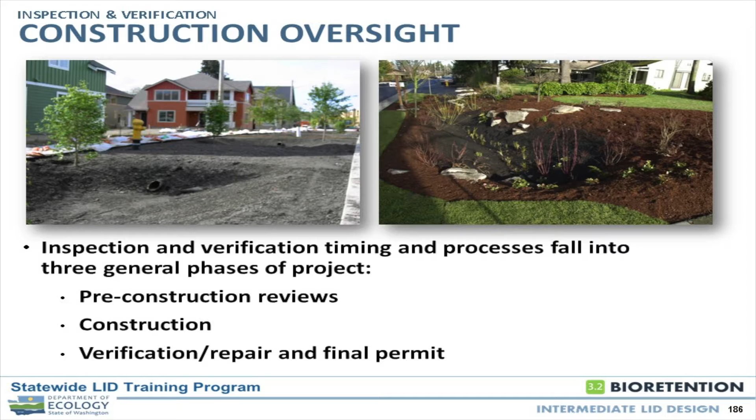On construction oversight, in general, the inspection verification comes in three phases: pre-construction reviews, critical construction, and then verification, repair, and final permit. So depending on your jurisdiction it might be a little different than this, but you can organize your inspection verification around that. Pre-construction reviews, I think this is probably your most important step.

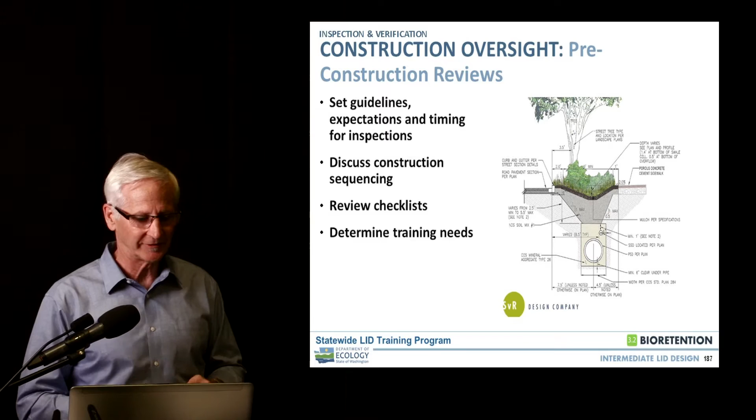You can avoid a lot of problems getting everybody in the room together. Setting the guidelines, expectations, timing for inspections. Construction sequencing, checklists, determine training needs. So just as an example of the importance of pre-construction meetings, checklists and plans.

Years ago, we built a low-impact development pilot project, and one of the stormwater requirements was that all of the lots, because they were entirely disturbed, they were very small, 3,500, 4,000 square foot lots, had to be compost amended, BMP T5.13, which you have to do now. By the way, that's just a blanket requirement now. Those guidelines were in the landscaping section of the plans.

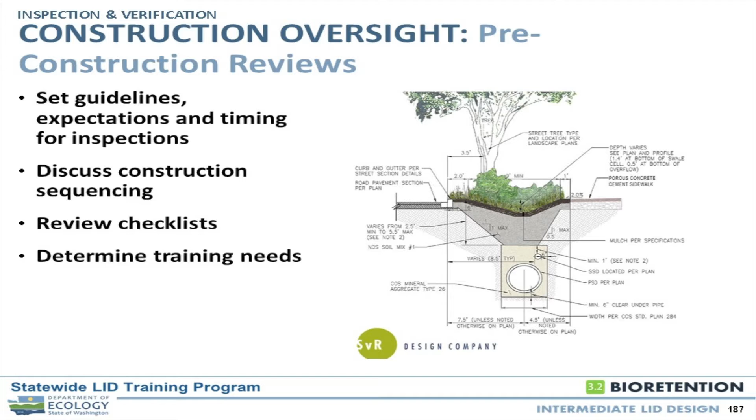Did the folks doing the utilities, stormwater, all that, look in the landscaping plans? And so at the end of the project, it comes to, oh, by the way, when are we going to get the compost spread and tilled in and do the compost amendment? And the developer says, what? What compost amending? Because they were not accustomed to looking in a landscaping section of the plans for stormwater requirements.

So that's a great example of how important it is to get everybody on the same page. Where is everything? Where are all the requirements? Are we all clear on what we're doing? What you're responsible for, and what's the timing of that? The pre-construction thing is absolutely critical.

Well, there's 2, 3, maybe 4 missing on this list purposely. What would be one group you would want in pre-construction reviews that might be really important? Has to do with road widths. Fire and safety. That's a really important one to have in the room, up front. In fact, earlier than this, in the initial design considerations, to make sure you're meeting all fire and safety requirements.

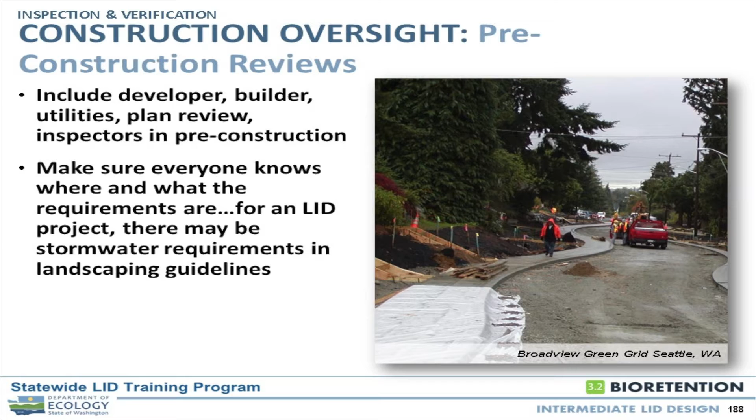Fire and safety is getting more used to seeing this stuff, but 10 years ago, fire and safety was a major barrier to the implementation of low-impact development, because there was a lot of talk about reducing road widths, right? And fire and safety was, wait a minute, my stuff's getting bigger, and now you're telling me we're going to have smaller roads? And so there was a lot of saber rattling around that. I think that's kind of settled down a bit, but that's a very important group to have in the room up front, very early on in design.

First site visit, pre-bioretention soil media placement. So here's at least a partial list of things you want to consider. And I'll mention at this point, I think Seattle now has some pretty good construction checklists that are available to use if you'd like. Very important, certify native existing soils are comparable to design considerations, temporary erosion and sediment control in place.

Rough grading to plans, underdrains and overflow, field changes. How are you going to deal with that? Are you going to accept photo documentation of certain phases of the project? That's a question you have to ask up front.

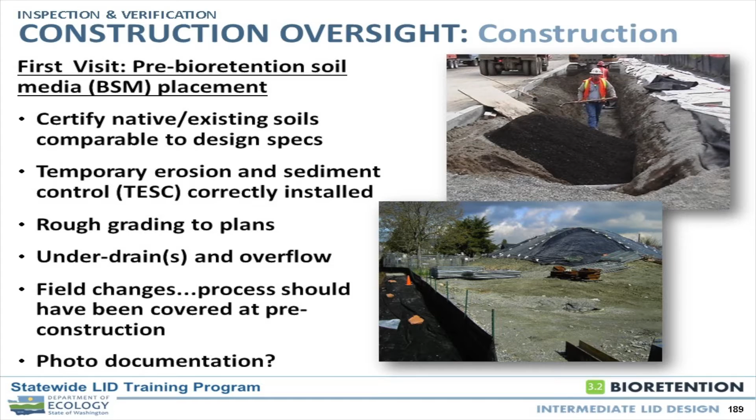Why would rough grading and final grading be critical for a distributed stormwater management system? So you've got more complex flow paths. You've gone from thinking about one big giant contributing area to what? Small contributing areas. Your grading's got to be right. Otherwise you might have contributing areas that are much bigger or different than what you anticipated. So, pretty important to pay attention there.

Second visit, this is after the bioretention media goes in. Now we've placed the bioretention media, and you want to, again, run through some checks, verify that the bioretention soil media meets the composition guidelines and depth. Probably not that long ago, when you accepted materials off the truck, whether it was topsoil, whatever it might be, you might have accepted a truck ticket.

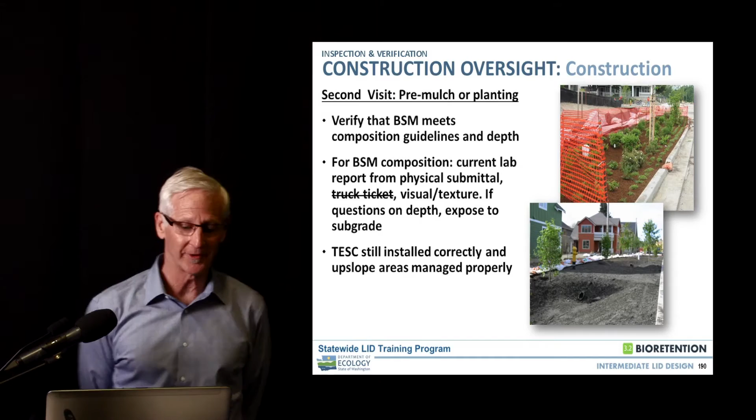And I remember many years ago, I've been involved in projects where they talked about verifying the media with a truck ticket. I think those days are, as Chris says, in the rear view mirror. You need to be more precise about that. And there are suppliers out there now, and those suppliers should provide you with verification of the material that's delivered.

We still have material coming onto sites that is not meeting specifications. On a project in Seattle, they had to remove, I don't remember how many hundreds of cubic yards of media, and Seattle brought a container of the material for me to look at and potentially test, and we didn't have to test it. It was obvious. They probably flipped it. It was probably 60% compost and 40% sand. You could tell right away, too rich in organic material, and it clogged immediately.

So this still happens. And so you have to verify that that material is meeting spec, and there should be verification of material that's being delivered, not material that was tested a year ago or 2 years ago or whatever. Okay, so this is pretty important. As I mentioned there, you can see truck ticket crossed out. Visual, textural, no way. A current lab report from a physical submittal. That's what you want to work off of. Truck ticket, no way. That visual, textural should be crossed out as well.

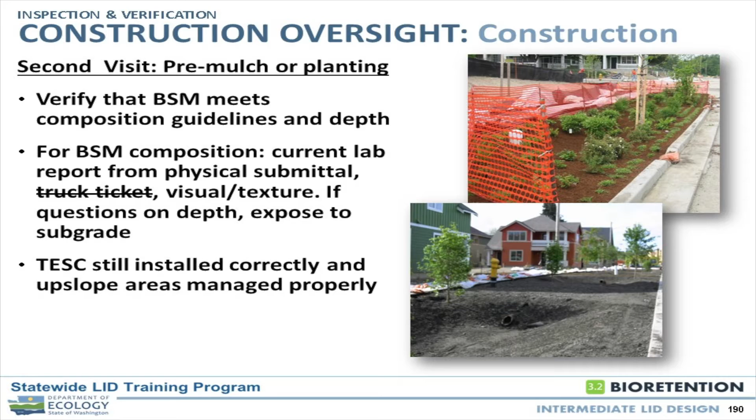Unless you're a soil scientist that's worked with bioretention media for the past 10 years, you are not going to be able to tell a 60-40 from a 40-60. It's very difficult for visual, textural inspection. Compost, however, if you have compost delivered and you're mixing some, there's visual and textural and smell that most people can catch on to quite quickly. But determining if bioretention media meets a specification from visual is very, very difficult.

Question is, perhaps in the future, a requirement for a soil scientist to verify this stuff? So far, I only have experience with a couple of suppliers, Cedar Grove and Walrath, and they're both quite responsible. They seem quite diligent as far as meeting the guideline and supplying that verification. So that probably would be enough, but you never know, especially as we get into other kinds of media.

Post-construction, verifying your final grade, again, important for contributing areas and that you have proper flow paths. All of that is in place. Contributing area, designed properly and stabilized, verifying that the media is not clogged, and infiltration rate adequate. Okay, so this is an interesting one.

What we've been finding in a lot of the media we've been testing is much higher infiltration rates than what's currently prescribed. Really what you're generally only going to be concerned with is if it's clogged and it's not draining. On the flip side of the coin, if it's draining too rapidly, and I was talking to a designer earlier about some problems where downslope cells were not getting any water, because it sounds like the media is draining quite rapidly. There's also that consideration. There might not be as much a tendency to replace media if it's draining too rapidly as opposed to clogged.

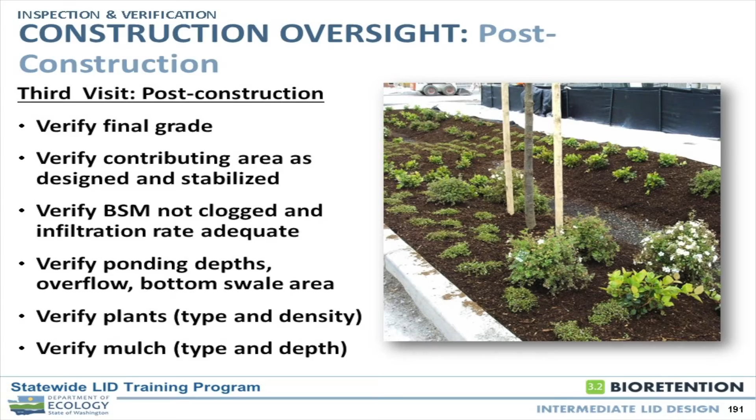The message I'm trying to deliver here is that media is variable. Generally, we've been seeing higher infiltration rates than what is prescribed, often quite a bit more, 50, 60, 80, 100 inches per hour. As far as assessing your media and whether it's draining properly, everybody take a deep breath and realize there's variability and that is the system working properly, and not necessarily focus too much on, wow, is it 12 inches per hour? It's got to be 12 inches per hour as a max. That's what I designed, and this is what it needs to be, or 6 or 8 or whatever it is. Realize there's a lot of variability here, and is the system working okay?

Just don't get too spun up about one number for bioretention media, because there's a lot of variability. Nevertheless, if it's clogged, you've got a problem, and you've got to deal with that. Ponding depths, obviously, and verify your plants and mulch, and then you're good to go for wrapping it up.

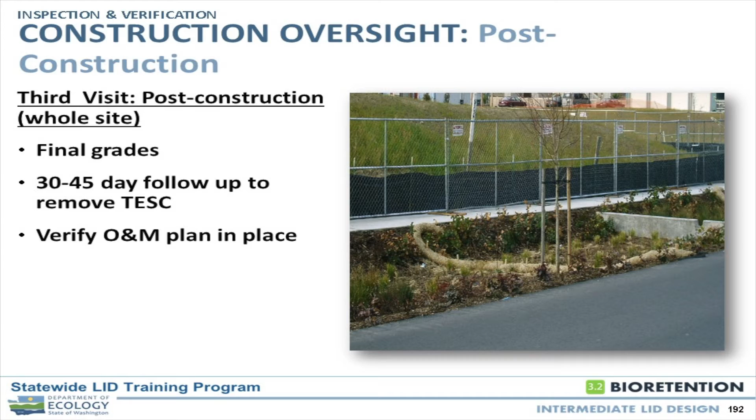Generally, this is a range that I've worked with and that other jurisdictions have mentioned, 30 to 45 days to follow up and remove your temporary erosion and sediment control and to wrap everything up. There might be some steps that you're taking that are longer than that for establishment. You might be doing some things to allow plant establishment in these systems that might go on for longer than that. And now, element 13, you're going to have an O&M plan in place. That's a requirement. I want to show you a couple scenarios. We're going to use a pilot project down in Pierce County as an example.

And humans are genetically predisposed to throw things in holes. You know it's going to be used for some construction debris. So how do you keep people out of there? Well, silt fence and proper installation of that silt fence and perhaps some additional protection might be fine for sediment because the grade's not steep into the bioretention area. It's actually sloped away a little bit. But really keeping people out of there is the big deal. So this is relatively easy, pretty straightforward.

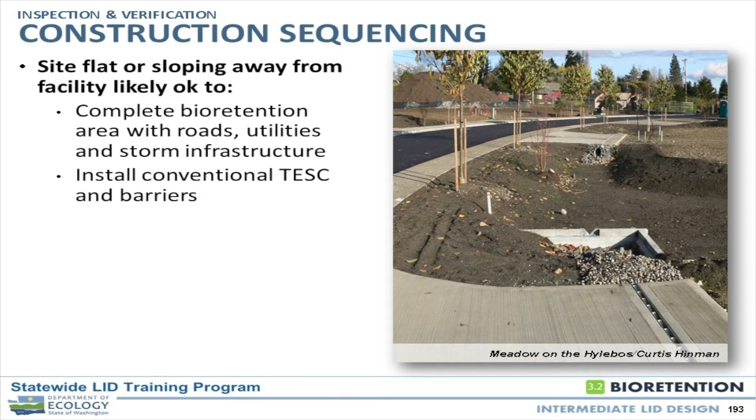I'll tell you what the solution was right now with that site. They bermed up the edge of that bioretention area about 3 or 4 inches. Obviously totally inadequate. Okay, any ideas of what you might do, all the way back to construction planning? I mean, that's fair game, how you'd plan this thing out. In this case, you really have kind of a major division. Are you going to divert the flows around the facility and treat them somewhere else? Bill is talking about, are you going to put it through a Baker tank or into another pond, a settling pond or whatever? Maybe that gets pumped out, whatever it might be.

Actually, in this case, we didn't have that option. It couldn't be done with the road configuration, unless you did collect it in one place, which was very difficult, and then put it in a pipe or something and moved it around. So we found that on this particular site, it was very difficult to bypass and deal with the construction flow some other way. But you want to be thinking about that. Can we do it? And how do we do it? In this case, it was very difficult just because of the configuration of the project. So we were stuck with water flowing into these systems during the home construction.

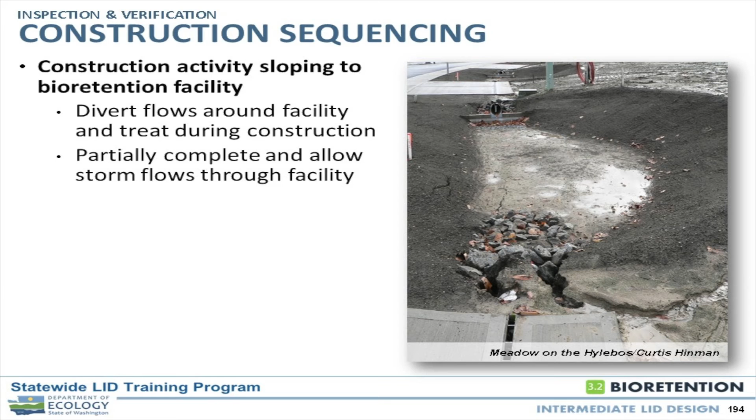There's a significant issue around that though. This gets back to construction planning. Everybody's got to be clear. That scenario requires that everybody knows what's going on. You have to know, obviously, the engineer, the developer, and the people building the homes have to know that construction sequencing, how that's going to work.

So for example, on this project, sort of a debrief with the home builder. In this case, there was one home builder. That was the one thing that made this project not absolute worst case scenario. There was one home builder instead of 30. In a debrief with the home builder, I asked him, well, hey, what if we had done this? What if we had roughed out the facility, put protection around it so you couldn't compact it, and this, that, and the other.

And then once the homes are done and you're putting in landscaping, you come in and finish the final grade, put in the media, finish these things. And the home builder actually said, I would have preferred that. That can work. It's just critical that everybody needs to be on the same page. You have to make sure this works for the jurisdiction.

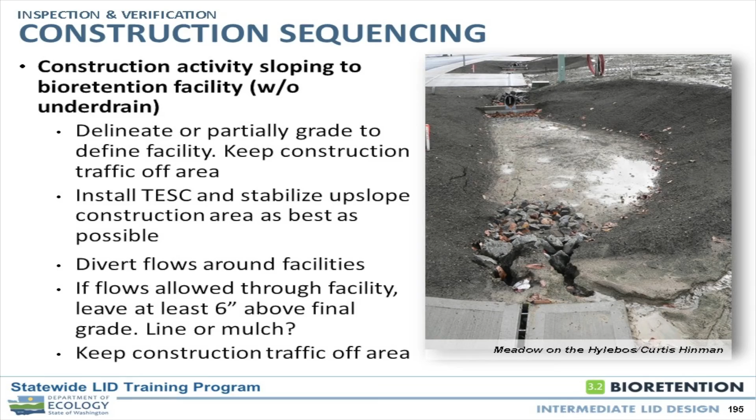There's some jurisdictions that are going to strongly discourage you from allowing any construction flows into bioretention areas. But having said that, there might be cases like the one I just showed you, where there's very few options. And then you sit down and come up with a good plan moving forward. And you make sure everybody's on the same page and everybody understands how we're moving forward with this.

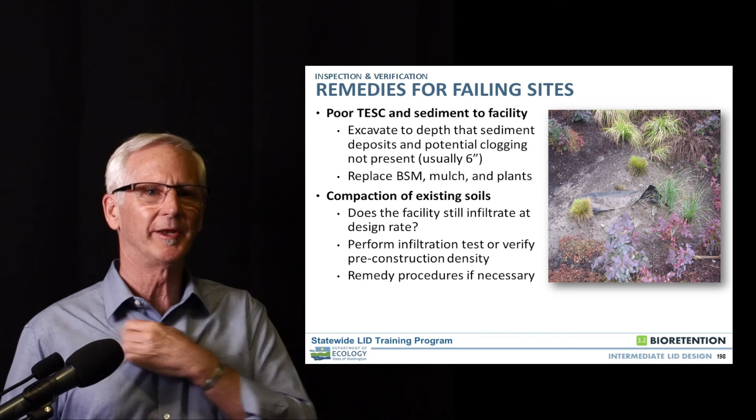So for sediment, we just talked about this. There are ways to deal with sediment that's relatively easy to deal with. The little bit of research, studies and monitoring around this, is that 6 inches of typical native soil provides a very good filter for sediment, so you can protect a facility if you leave it proud, 6 inches. And if there's sedimentation to the media or the mulch, and certainly before you plant, it's pretty easy to remove that mulch and scrape off some media until you get to a point the engineer says you're good to go. That's as far as sediment.

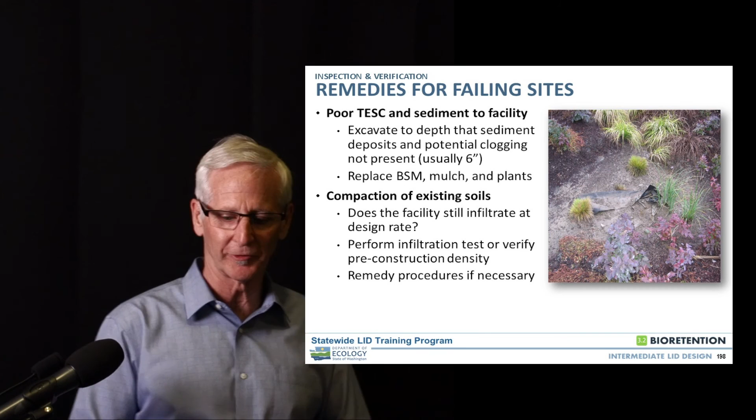Compaction's a different story. And the first question you want to ask: does the facility still infiltrate, whether it's the subgrade or the media? So before you say, oh, we got to tear out all the media because you've been in there with some machinery or whatever, take a deep breath. Does the facility still work? Do some tests and then move forward.

Subgrade compaction is your toughest scenario. If it's wet and it's been compacted by heavy machinery, you might have compaction down 2 to 3 feet. Depends on the soil type, the machinery, how wet the soil is, but that's why you really want to work to not allow compaction in these facilities. If the media gets compacted, that's a relatively easier scenario. You might have to remove the media, but that's fairly easy compared to deep subgrade compaction.

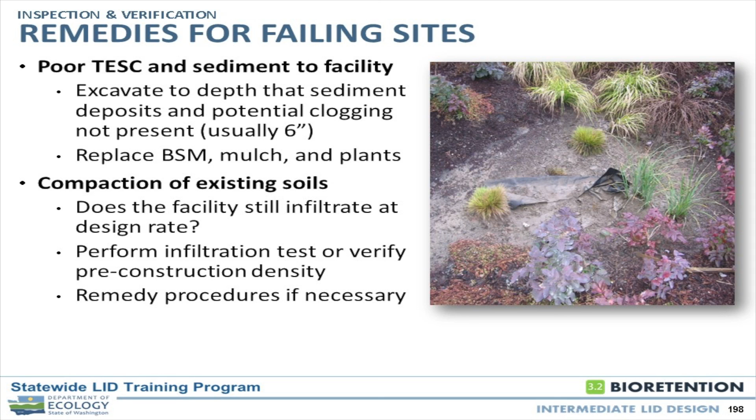And for preventing compaction, I'll reiterate that usually silt fence is not enough. If you really have a tight building scenario, you're probably going to need to put up some robust fencing to keep people out of that. I've got lots of horror story pictures of silt fence that's just flat on the ground, and the bioretention area is full of sheetrock, and there are outriggers in it and all that. So you need more than silt fence. Probably more than that orange fence too, in some cases.